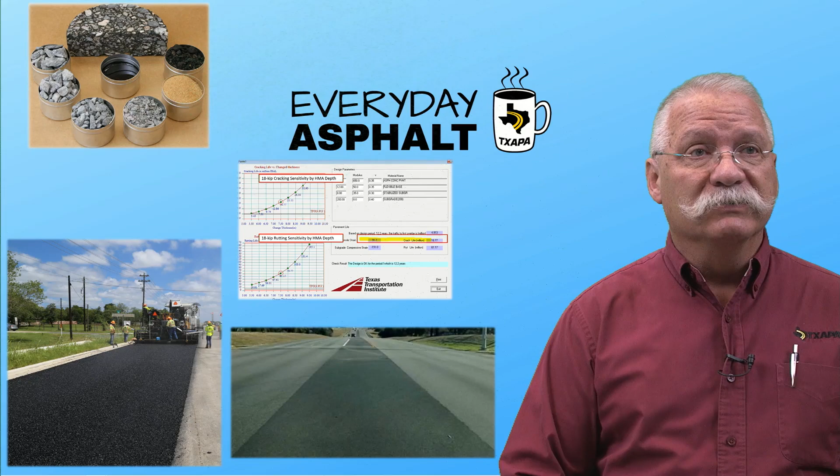The purpose of this program is to go a little bit deeper in the areas of materials, design, construction, and maintenance, just to go a little bit deep there and to talk about these issues and how they relate to each other.

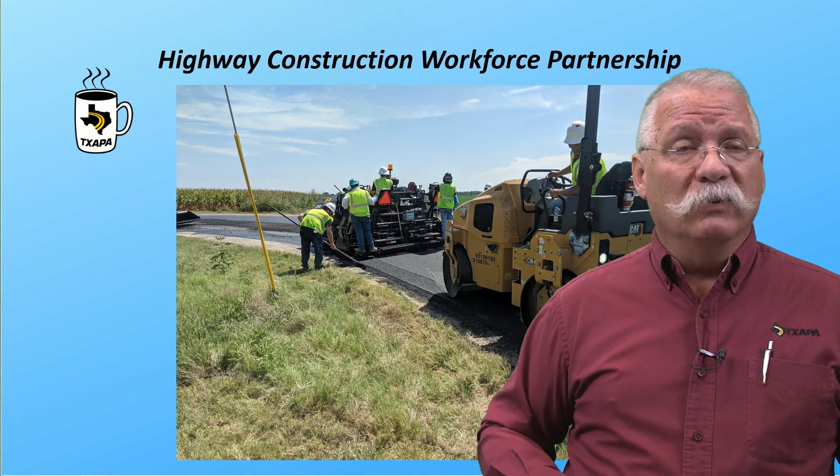So let's take our first trip. Our first trip was over to Bryan or College Station. I was over there a couple times over the last month or so, working with the Highway Construction Workforce Partnership. What is that? Well, it's a program. It's in its second year now, and they just finished their second class, I think last week while I was away. Yeah, they finished. I think they graduated on Friday.

This is a program to reach out to graduating high school students and people that are young coming into the business and give them an opportunity to learn more about construction in general and specifically the asphalt industry, to hopefully push some people into our area. We're all looking for new people. People are retiring. People are moving. We always need new people. We need technicians. We need engineers. We need people that can work the paver and everything else that's out there. So we're always looking for that.

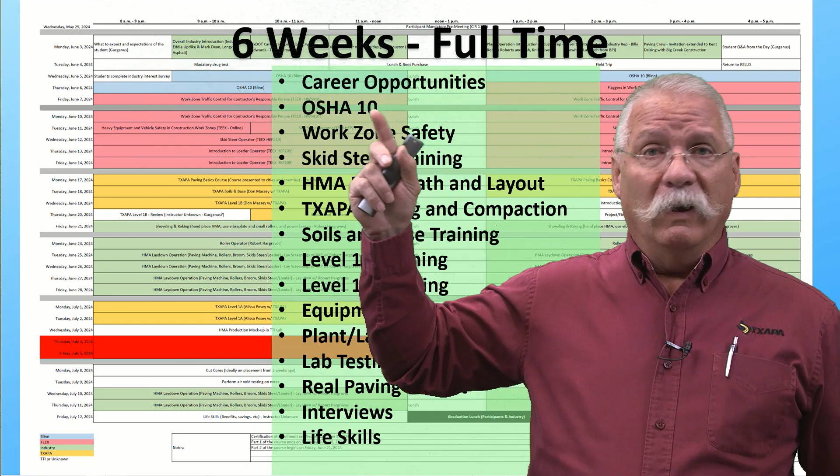So this is an opportunity to take somebody fresh out of high school, for the most part, and expose them to a whole bunch of different areas. What do they expose them to? Well, right now it's a 6-week course. It's full-time, 5 days a week, 8 to 5. And they talk about career opportunities, safety, OSHA 10, work zone safety. They get them on equipment. They're running skid steers. They're actually doing construction math. I spent a day with them. We spent a whole day just talking about paving and compaction, how the paver works, etc.

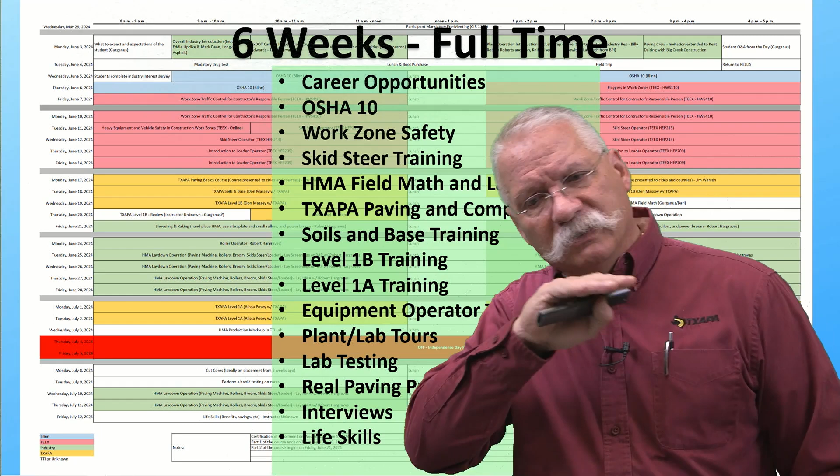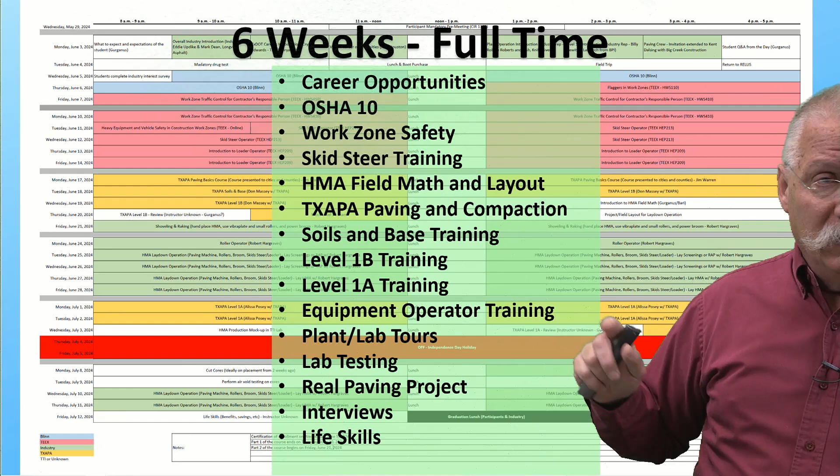And then they take that out into the field, as you saw in the picture, and you'll see some more. Our HMAC group across the street here, they go out and they work with them on soils and base training, level 1B, level 1A. So they're exposed to safety equipment, mathematics, the paving operations, the testing operations. They give them equipment operator training on skid steers, brooms, rollers, pavers, etc.

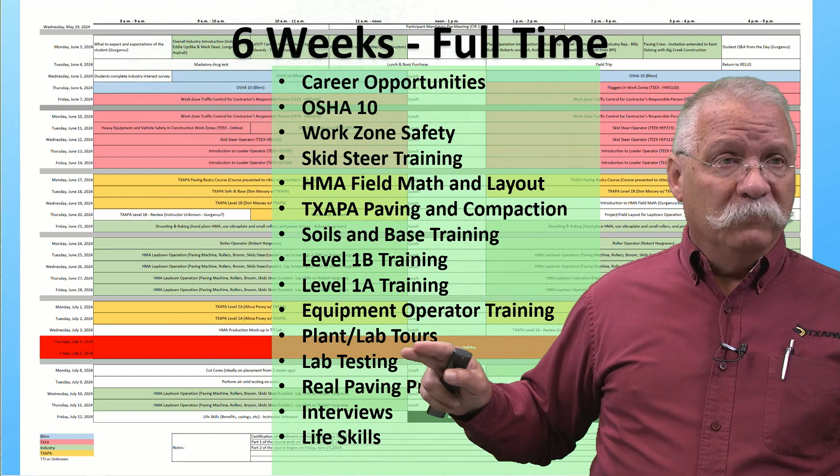They take them to asphalt plants. They give them lab tours. They actually get them in the lab doing some testing, and out on an actual project. I'm going to show you some pictures there in a second, and then they also help them with interviews and life skills and try to tie these folks up with people that are actually hiring.

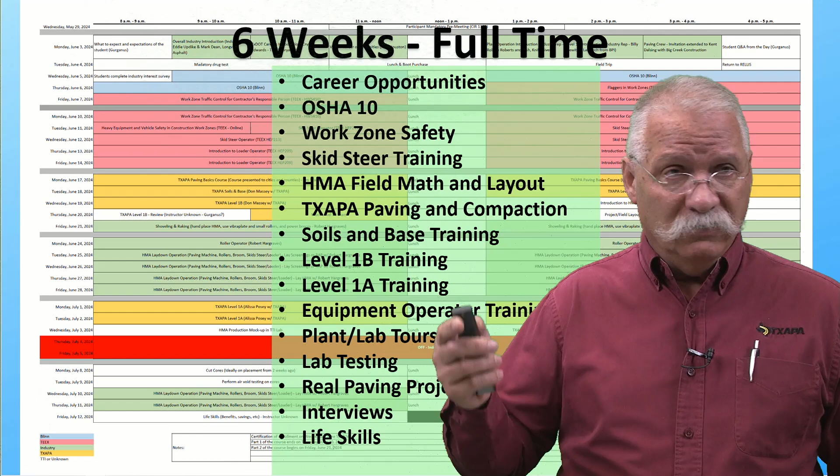Okay, that's our first stop. Our next stop is, now we're getting back into the material side, which some of you guys may be a little bit more toward. I'm going to talk about TOM mixes, thin overlay mixes, okay? Part of our arsenal of asphalt mixes that we can use in our pavements. We just want to make sure we're using them in the right places. Now, TOM mixes are great mixes, and they've got a great application, but they're not able to be used everywhere. If you're really standing loads, stop, start stuff, bike paths, bus pads, there's other mixes available. But for a preventive maintenance mix or a preservation mix, really top-notch material.

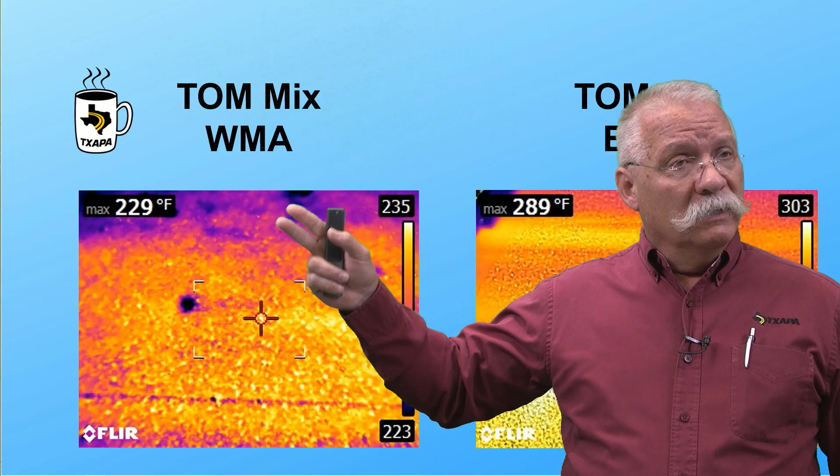I don't have a picture of that, but here's a picture of a TOM mix placed as warm mix, and you can see the temperature up here, 229 degrees, and this is just behind the paver, so we haven't really got on it yet with the rollers. Obviously, we're putting a modifier in that material, a compaction aid or a warm mix additive, if you will, to allow us to lay that material at a lower temperature. And guess what? It lays.

Okay. Now these mixes get a little bit stiffer because these TOM mixes have a PG 76-22 in them, and so that's a stiffer binder. But with these compaction aid warm mix additives, we're able to actually get a little bit more workability at a little cooler temperature. Now, are there limits? Absolutely, on everything. And that's the whole thing about this business, the business isn't afraid to try stuff. Sometimes it works, sometimes it doesn't, sometimes it's a home run. And so we're looking for those home runs.

Okay, so again, we try different things. This is a project where they also tried an engineered crumb rubber. What's ECR? Engineered crumb rubber is a dry rubber product that's added, like an aggregate, into the mix itself. It's not added as a binder. And so the idea there is to get some engineering properties out of that, which will improve performance.

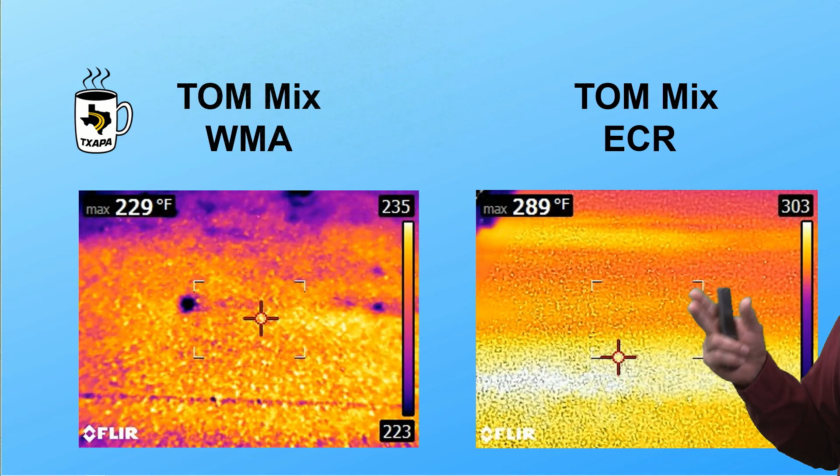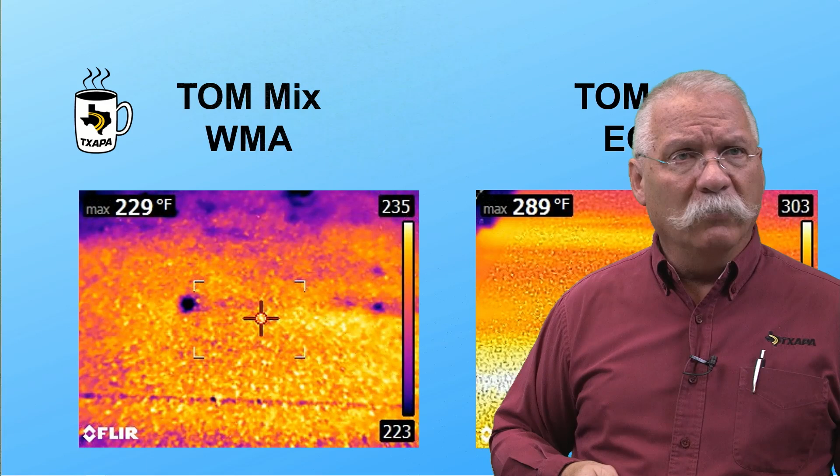And so, again, these are different products that we're trying, and this one laid pretty well. Looks pretty good, looks pretty consistent. But we're going to get it out there on the road, and it's down there kind of in the range where they've got a lot of quarries and trucks and all that sort of stuff. So it'll get a fair bit of traffic, and we'll be able to try that out.

So there's another project, and this was kind of fun because we were doing things that we didn't really intend to do. Opportunities came up and people jumped on them, and we tried that. Out on 130, there's a project right now that's ongoing, and the project is a concrete rehab, or whatever you want to call it. They've got an existing concrete pavement out there that's had some issues, settlement issues and cracking and patching.

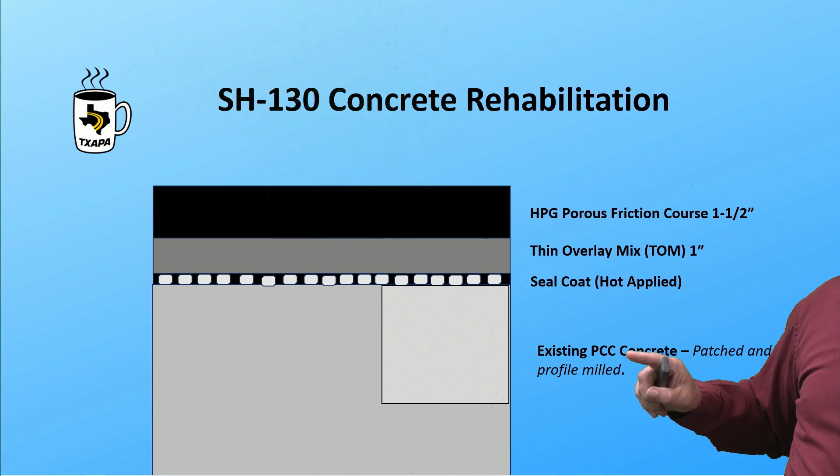So they went in and they patched the existing concrete, and then they profile milled it. And the folks who did the profile milling did an awesome job. They really, really did a great job. So this is a Lone Star project. Big shout out to Lone Star. These guys really stepped up to the plate.

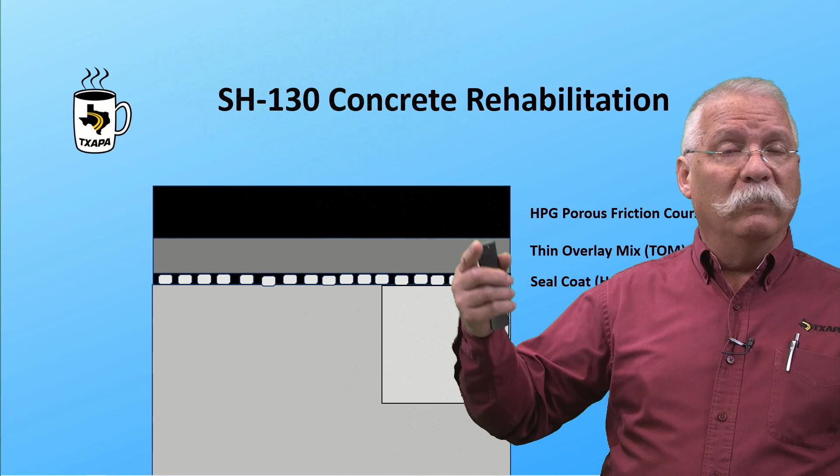So the project is, they did the prep work on the concrete, and then they're going to place a seal coat down. They do a hot applied product down there, and that stuff is not going anywhere, okay? And then they put a TOM down there to help level it up and smooth it out a little bit. And then they're going to come back on top with a PFC with the HPG, the High Polymer Binder, in there. So about two weeks ago, they did the trial batch for the HPG PFC.

But they had some extra binder left over because of how you've got to buy that material. Typically you have to buy 3 loads of it, because they have to make that material, and you just can't make a little bit of it. And that's another point I hopefully want to come back to as we wrap up. But so they were doing the trial batch, so we had an opportunity to use some of that leftover material to do some other stuff.

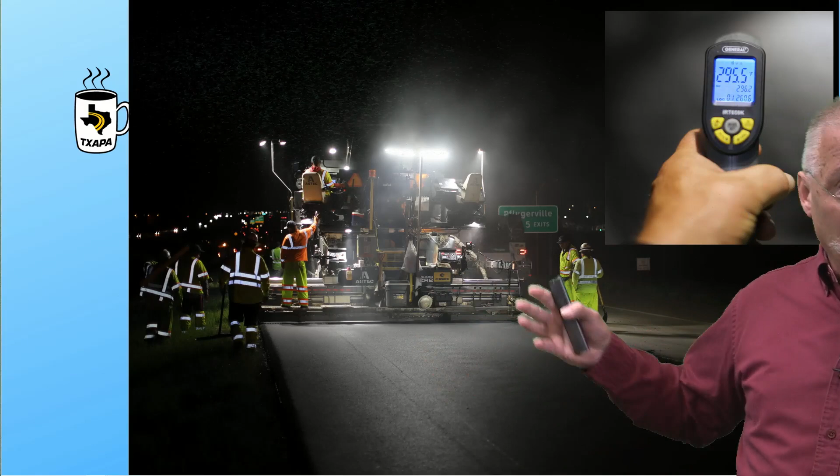Now I don't have a lot of pictures and videos, but I've got a few. So this is the mix back there, running behind the screed right now. When we get that material up to temperature, we're running right around 300 degrees. That seems to be a key aspect of these high polymer binders. When they did the project on I-35 last year right here in Kyle, they did a high polymer binder SMA, and that mix laid really good at about 300 degrees right behind the screed. So again, you kind of get a sense of that.

These mixes with these very stiff binders are not going to lay at cool temperatures. So that's an issue, but again, we've got opportunities where we can lay it. So this is what the material looks like, obviously at night. You can tell it's got a nice texture moving along down the roadway. Here's another picture from the side.

So typically, when this material is running like this, it's close to 295, 300 degrees or so. And again, that's what we see as being kind of a good number, okay? And then here's a video clip of the compaction operation.

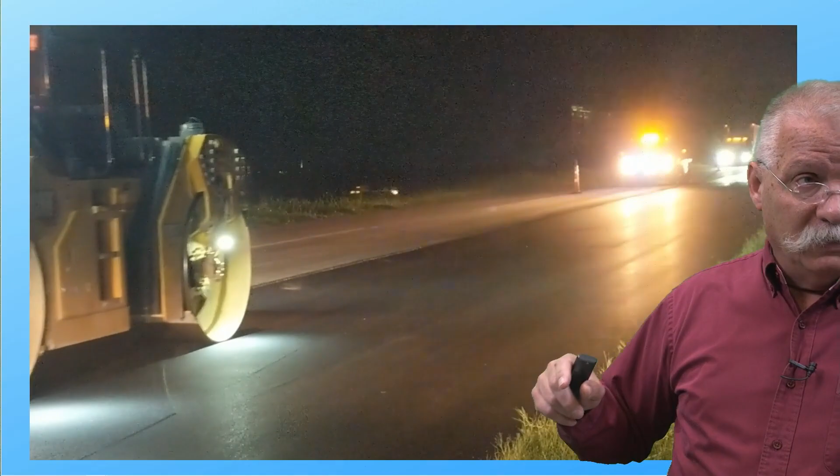They had 2 rollers working in echelon with each other, which I think is a really good way of rolling a lot of mixes, particularly any sort of production mixes. And so they're coming up, moving pretty quick, and then compacting that material and getting it seated into place. Now the test results look good on this material. I don't have them to share with you, but I was able to look at them, and everything did turn out well in the process.

So what did we learn? We learned temperature is super, super important with this material, and consistency is important as well. Will this limit where we can put it? Not necessarily, but it may limit when we can do it. So this is not going to go well in really cool weather.

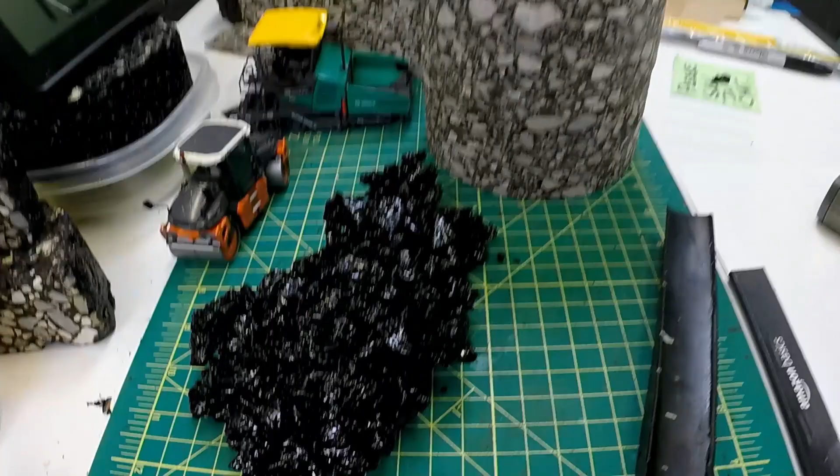But what they really wanted to do, they wanted to take their PFC and add that high polymer. This is just a chunk from the trial batch. We're going to talk about that here in just a second. But they were trying to improve the performance of those high polymer binders in the process.

So here's a video of it at the plant. They did their trial batch at the plant, placed some material at the plant. Here's the material flowing out of the truck. So people say, hey, this material won't flow. You get it at the right temperature, you build it right, it flows. It's not a big deal.

Okay. Here's some material behind the screed. Again, we're paving in a parking lot here, and so that's not necessarily the best of all the situations, but we're trying the batch and seeing how it goes through the paver.

Now, just like the TOM, just like any mix, an SMA, a TOM, a PFC, or even a dense graded type material, the handling of the equipment, making sure the equipment and the plant and everything is up to speed and maintained properly is really critical.

These materials are going to stress the equipment. They're going to stress the pumps. They're going to stress the motors and all the systems in the equipment. So we want to make sure when we get to paving around and making these kinds of mixes and placing these kinds of mixes, everything is in good shape. We check our equipment out. We're not going to have an issue. So again, we want to make sure.

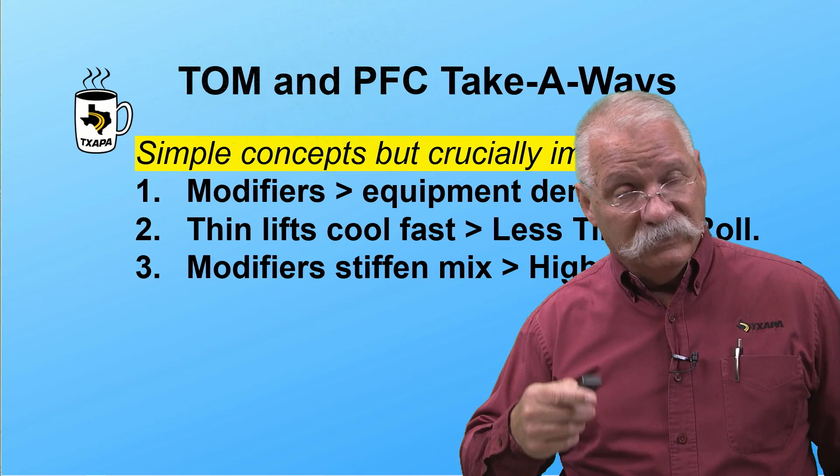When we modify it, it just makes it harder, not impossible, but it makes it harder. So we have to work a little bit more diligently there. When we put modifiers in the mix, our finish, or our time to where we're getting compaction, actually narrows a little bit. In many cases, with typically thin mixes, you may have maybe 10 to 12, 14 minutes, and now you're going to start losing time on that because your finish rolling temperature, wherever you'd start finish rolling, is now much higher.

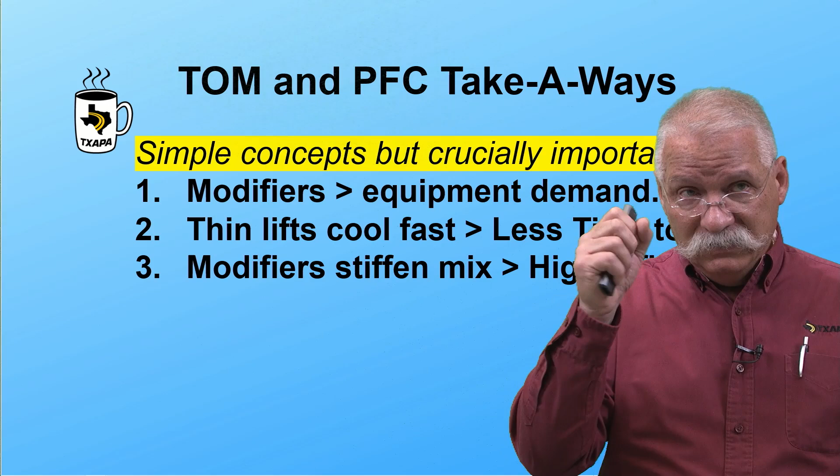Okay, your density rolling zone is actually increasing, maybe from 190 to 200, maybe to 225 or 235, or even up in that range. So you're losing some temperature because that mix is really starting to stiffen up. We got to get all over it. Okay, so when you add thin lifts and modifiers together, again, you've got a shorter window to do that. It's not insurmountable, but we just got to understand that we have a shorter window that we've got to keep track of. That's all. We can handle that.

Now, do I want to be paving a thin lift with a modifier in December? No, I do not. I do not. I want to give myself the opportunity to do this and get it down. Again, we're paving at night. Night takes time away as well, so we've got to be watching that.

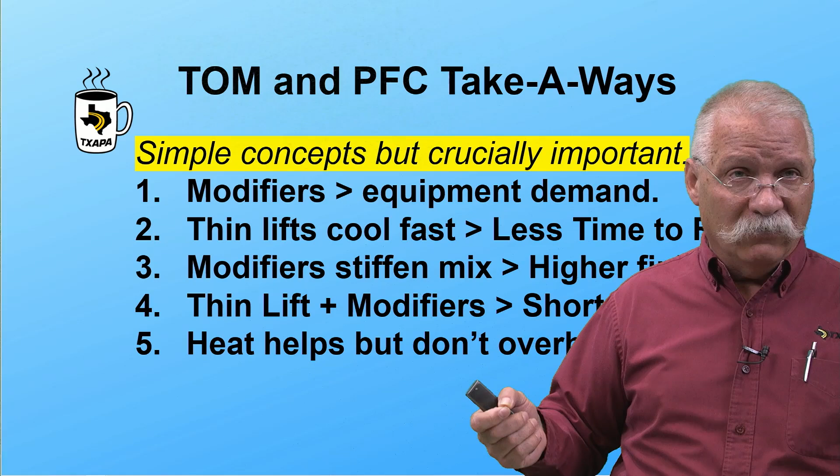But again, opportunities. Heat helps, but we don't want to overheat the binder. So I don't want to just go ahead and jack the temperature way up, okay? Because at some point you start damaging the binder itself, which takes life out of the pavement. So you're kind of defeating yourself. I want longer life, so I'm using better binders, but I overheat it and then I get less life, so I've just got really expensive stuff out there that's not really giving me any other benefit.

We need to pave consistently. So we need to produce the material, we need to haul the material, we need to pave the material consistently. We don't need to be big, we don't need to run out of trucks. You may want to over truck if you get into this. I know I just said a bad word, but we want that paver to be moving, okay? And we want to keep the operations tight.

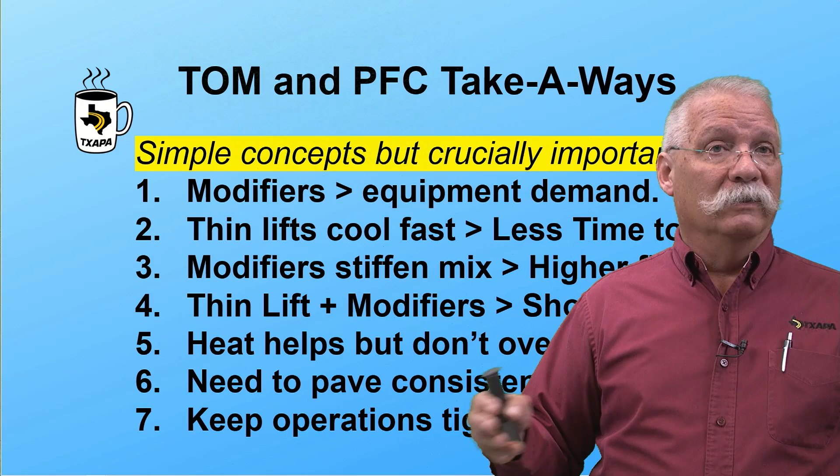And I would keep a loader out there just in case I needed to use it, okay? And I think that's just a good rule of thumb out there. If you get in a situation where you don't have a loader, you try to shovel everything by hand. By the time you get done with that, you got a problem. Keeping a loader handy is a good thing, okay?

So, thin lifts, PFCs, or TOM mixes, different binders, a lot of stuff going on. We can do this. We can do this. Other people can do it. Heck, Texas can do it. Why not? We're gonna rule with this.

The other thing that's been happening, and this is something I've been working on kind of by myself for a long time, and other people have as well. There's test sections at NCAT. South Carolina is using this. Oklahoma is now using this kind of concept, which is going to thicker lift paving. Well, what's thick lift paving? Thick lift paving is not 2 inches. Okay, thick lift paving is not 3 or even 4 inches. Now we're talking 5 to 6 inch lifts

one pass, one paver. Oh, everybody's going to go, oh, you can't do that. Well, we can. It's been done. It can be done, it's done a lot, okay? And so we just need to do that. But can we do that with some of this HPG mix and really develop a monolithic super slab of asphalt out there that's really going to kick butt and take care of the traffic? So that's what we're able to do.

Again, big shout out to Lone Star, TxDOT, for jumping in there. They pulled extra samples to test this material, etc. And so what they did is, here was the premise: can we lay asphalt 6 inches thick and get density?

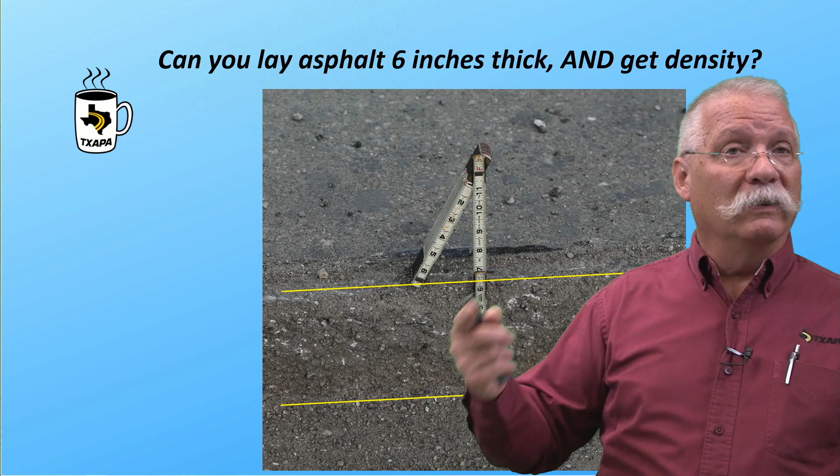Okay, so what Lone Star did, and again, big thanks to them, they milled up part of their parking lot, their entrance to their asphalt plant. We went and we paved. So they milled almost 20 feet wide, like 19 and a half feet wide, and this is about 100 foot long, thereabouts. I can't remember exactly. And so they got it all ready. They tacked the edges and all that kind of stuff, and then they paved it.

They paved the 6-inch lift. That's compacted, not loose. And so obviously sometimes we get in a hurry, sometimes we have to do a little extra handwork. That happens. This application would typically not be a finished surface, it would be a lower layer, so we can work some of that sort of stuff out. But again, they pulled off the joint, paved up, came back, paved the other side, and they were done in a pretty short period of time with this material.

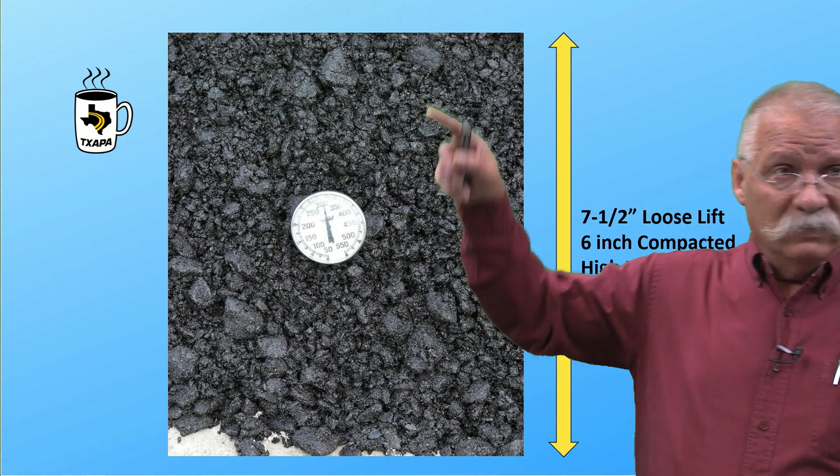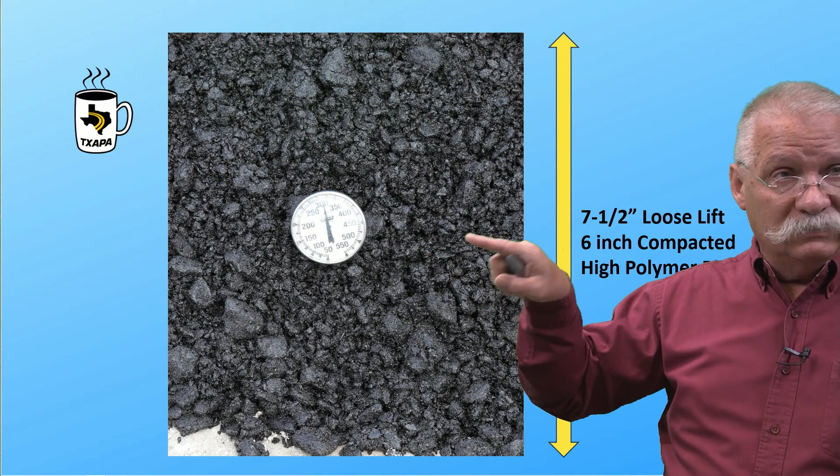Again, a 6-inch compacted lift, the mix goes a long way. But this is summer. This was in July. So what's going to happen to that temperature? It's going to hold heat. So this is a cross section of the pavement. This is now 7.5 inches loose, 6 inches compacted. This is a probe thermometer in the mix in the middle once they laid it, and we're 310, 315 degrees in the middle.

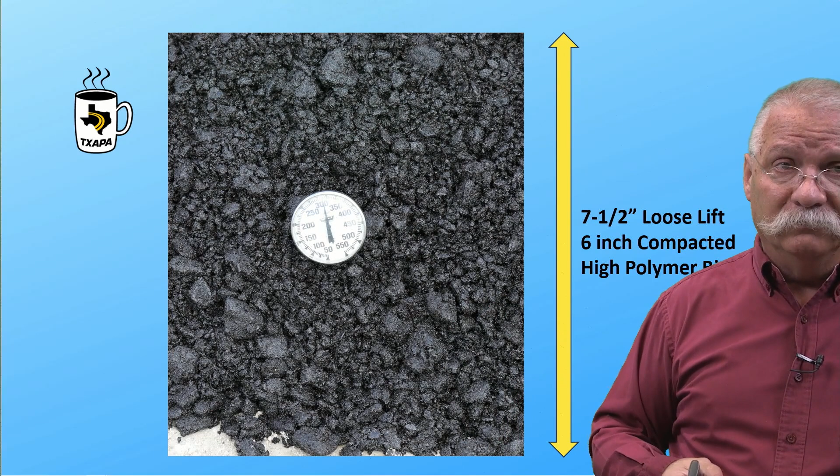Now this material is going to hold temperature for a while, actually quite a while. And that's the one thing that we're going to have to control as we move on down the roadway in the process. So again, there's another picture of the material. In this case, if you do about 1/4 inch per inch, you need to be about 7.5 inches to the top here. And so this is about 1.5 inches. This material is going to compact to get it down.

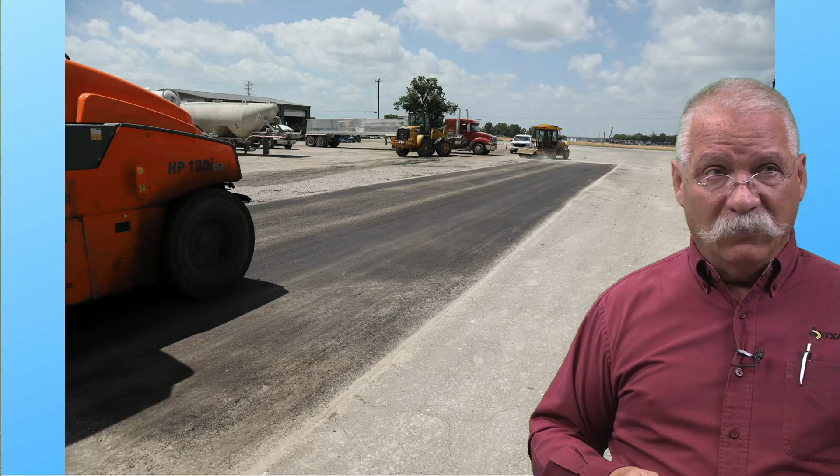And again, I apologize for not getting as many pictures. I was running around doing a bunch of stuff, but they came out with a vibratory roller, and they made 4 passes over the material. And they came out with a big rubber tire roller, and they made multiple passes across that. And they came back with a finish roller and finished it out.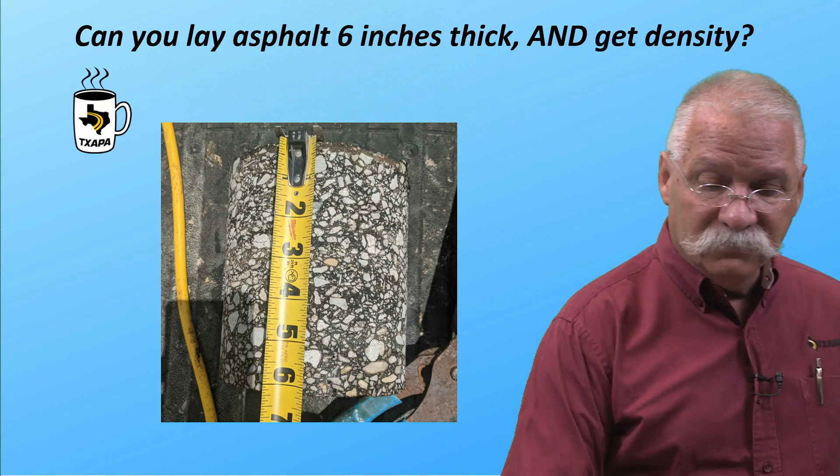Again, this is the entrance, so this is going to get a lot of traffic. Rock in, mix out. So it will be interesting to see how this performs. But indications are, based on performance in other places, this stuff's going to be a rock star. So again, we go back to the question: can you lay 6 inches and get density? So here's my sample right there. That's 1 core. Here's my roller. Can we get density?

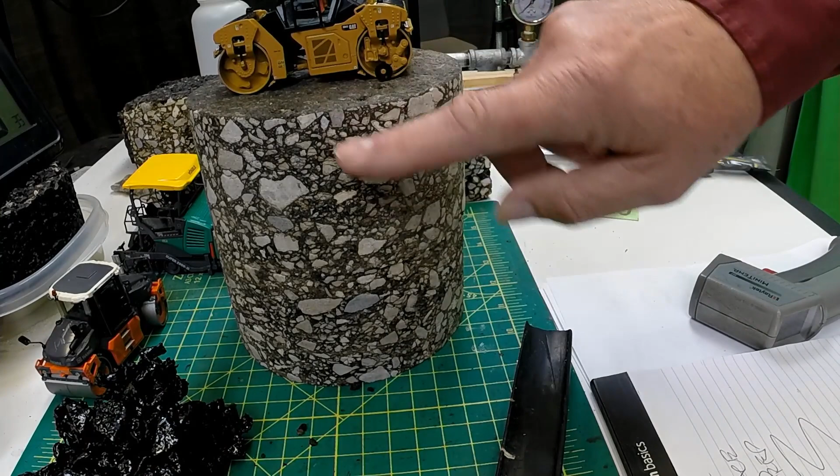And they actually cored that sample. They split it in half. They tested the top and tested the bottom. So again, it was laid in 1 lift. Let me get back over here. And how did they do? So they did 2 cores. The first core averaged 4% in-place air voids. That's pretty darn good. People say, well, this stuff won't compact. The second core, it was 3.9%. Really consistent.

They split it. The top half was 3.7. The bottom half was 4.2% air voids. On the second core, 3.3, 4.4. But if you look, say, hey, they're not the same. Yeah, but look at the density we got out of the bottom. That's pretty darn good in the big scheme of things. So we are able to get it.

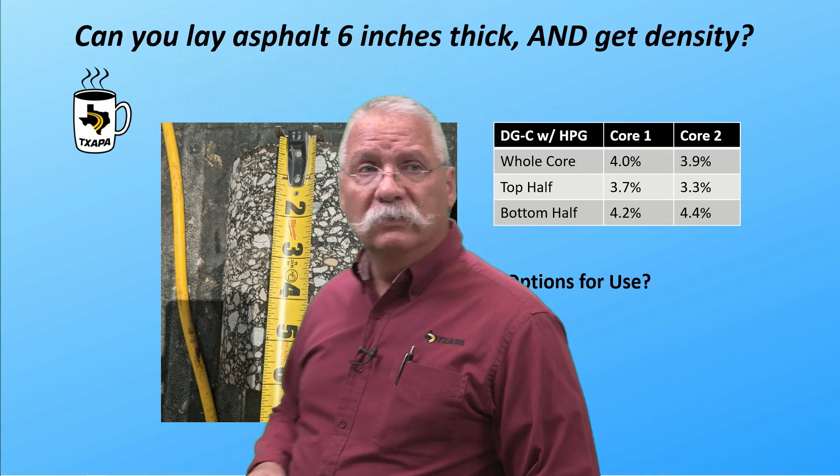And think about it, I no longer have an interface in here. I can lay the mix quicker. I can get it done faster. So that gives me some opportunities. So what might be our options for use for this material? One is a deep rehab, a rapid rehab. I've got a problem with the pavement.

I want to be able to go out there. I can go out there with a milling machine. I can mill down 6 inches or whatever I want to do. I can come back and I can put a 6-inch compacted lift in there. I can let it cool, and then I can let traffic run back on it. Okay? So I'm going to need a little bit more time to let it cool.

Understand it? But in many cases, in some parts of the state, they're taking asphalt out, they're putting concrete. How long does concrete take? Well, we're not talking hours, we're talking weeks. So it's a little bit different thing, but if we want to fix it right, this might be an option.

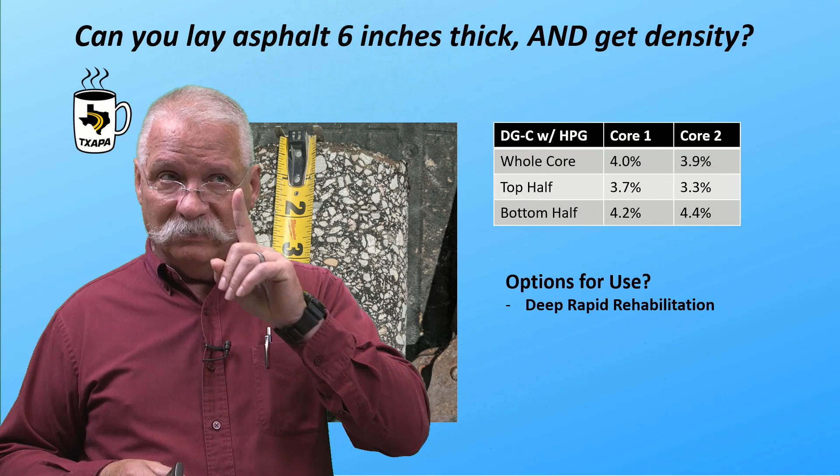Heavy duty pavement applications. Again, Texas is growing, we've got more traffic, got heavier loads. This might be part of our solution for laying thicker lifts and getting stronger pavements out there to really help carry the loads.

Perpetual pavements. Perpetual pavements are designed to minimize the strain on the top of the subgrade and minimize the tensile strain on the bottom of the asphalt. Okay? With some of these type modified binders, they're not going to crack. And with a thick enough slab, they're not going to damage the subgrade. So you get in the situation where you never have a problem with the base. Any distress that you have long term ends up at the top, and I can mill and replace that overnight. So that's really kind of the concept of a perpetual pavement.

Rapid intersection reconstruction. Again, we just talked about that. So there's an option there, I think, to maybe go in and fix these problems. A lot of times in intersections, we're going, hey, it's rutted, we're going to go rip off the top 2 inches and put 2 inches back in.

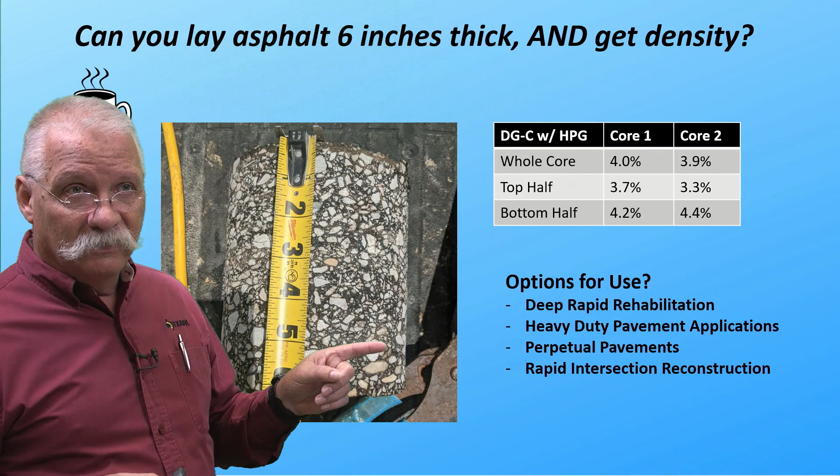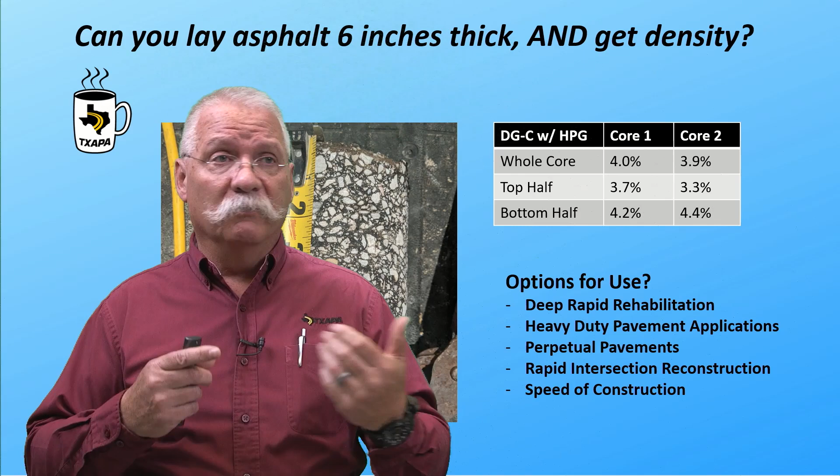But if the problem is down deep and we really need to fix it, we're going to need a little bit more time. But maybe with this technique of going in and milling in, putting that first slab in there, maybe come back and do some profile milling on top, and then put another wearing course, if you will, on top of it, may give us some more options. I think there's a great benefit in here for speedy construction. Great benefit in there. And then just stay tuned.

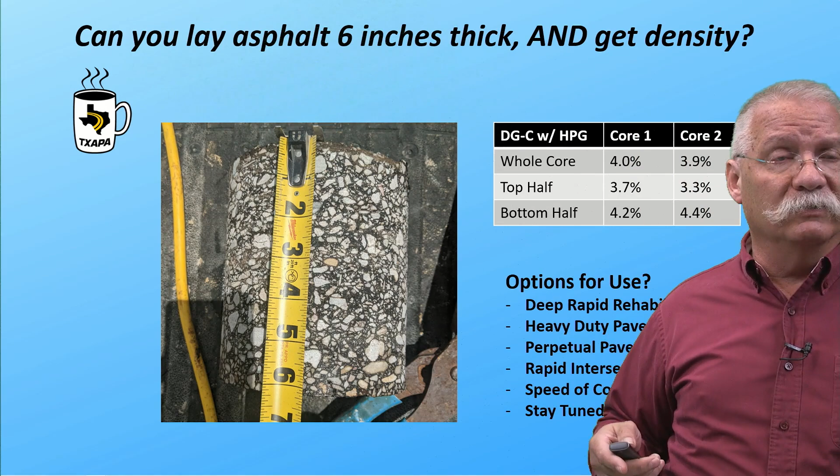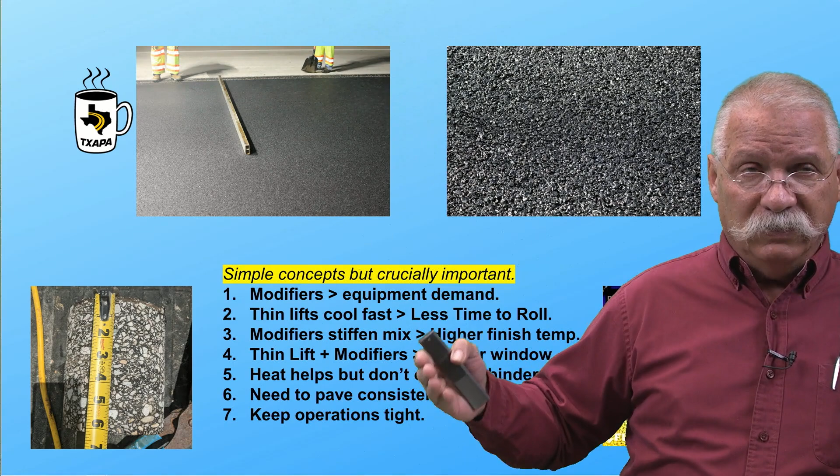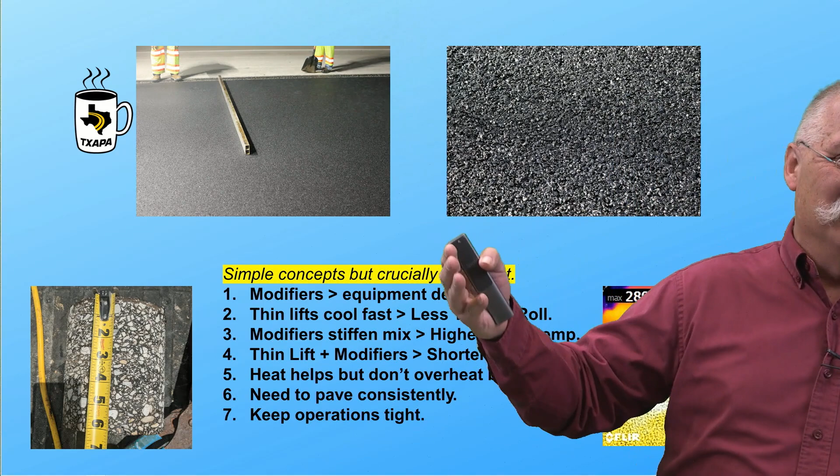Okay, so again, simple concepts in here. When we start talking about modifiers, this is not your dad's asphalt, not my dad's asphalt. These are different. They're going to have to be handled differently, but what they bring to the table, I think, is the potential for significantly increased performance. So just don't be afraid of this stuff. As Chuck Fuller would say, don't be scared, because this stuff can work. So great opportunities out here with a lot of this material.

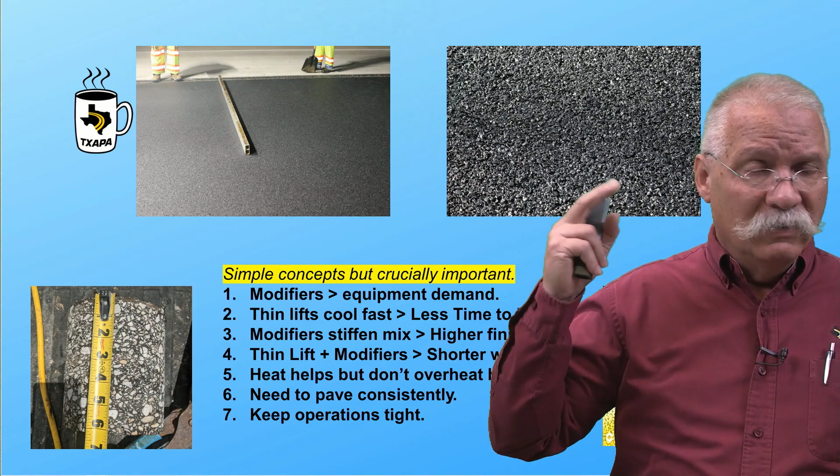And we got stuff on the ground. We're testing it, and a big thing again, thanks to TxDOT for trying stuff, let's see how we can make it work. Again, big thanks to TxDOT, MTD, TxDOT Austin District. Again, big thanks to all those folks as well. So, anyway, that's kind of wrapping it up here.

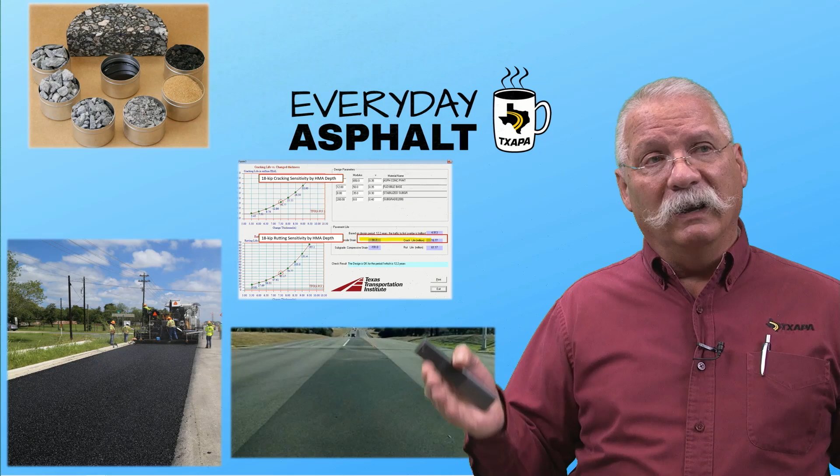Again, the purpose of this session here today is to talk about things that are going on. And so our road trip this month not only looked at getting people into the industry, but also looked at modifying binders, modifying mixes to actually make mixes better. And again, that thick lift, that was a Type C. That was a dense graded material. That wasn't Superpave. That was just a dense graded material. So again, we've got lots of options out there that we can do things in the process.